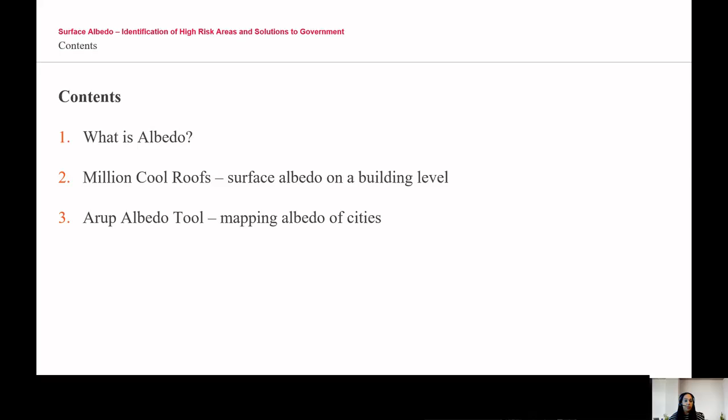So today's talk has three main areas. The first is just a brief introduction into what is albedo. The second then looks at this on a building scale and specifically through our work with the Million Cool Roofs Challenge. And then the third part of the talk looks at this on sort of a city scale with the Arup albedo tool.

So to start off with, what is albedo? Last month's webinar, there was a great presentation on urban albedo, and it was really fascinating. This month's talk is specifically about surface albedo, so I'll be talking a lot more about roofs. But to start off with, introducing albedo. Albedo is a measurement of the surface reflectivity.

So ice has a very high albedo of about 0.9, meaning that it reflects a lot of the sun's energy, whereas concrete and asphalt have a low albedo of around 0.3, meaning it absorbs a lot of the sun's energy which lands on its surface. With our increasing temperatures and our melting ice caps, the overall albedo of the Earth is decreasing, meaning less reflectivity of the sun's rays back into the atmosphere and a greater warming effect.

Many die every year from overheating, particularly in less developed countries where mechanical conditioning just isn't feasible. And a simple solution to this lies in our urban environment and choosing materials that will increase reflectivity, like white roofs and white roads. With the incorporation of lighter aggregates and cements, concrete can gain an albedo such as 0.7. And in Arup, we've been looking at this on a building scale and a city scale and how we can best present these albedo solutions to decision makers.

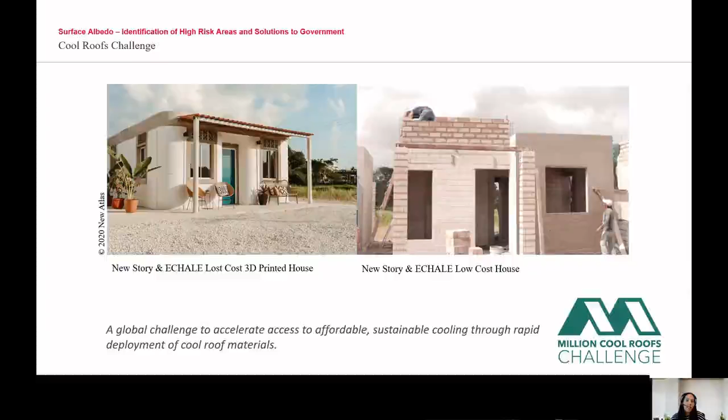or just too expensive. The Million Cool Roofs Challenge is an organisation involved in implementing high albedo strategies worldwide. And Arup have partnered with ECHALE and New Story, who were involved in the construction of building homes for families who are living in extreme poverty, often living in dangerous and rickety makeshift shelters. So the image on the left is an example of one of the houses constructed, and this is a 3D printed version, and the one on the right is constructed with more traditional methods.

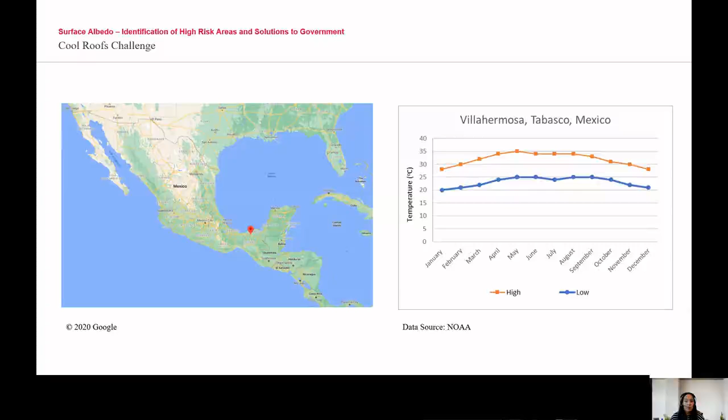It's worth saying that here the roof is flat, which is sort of advantageous for reflectivity, but also when talking to the families that will live in these houses, they were really keen on flat roofs as well, so that they could potentially build a second story if possible in the future.

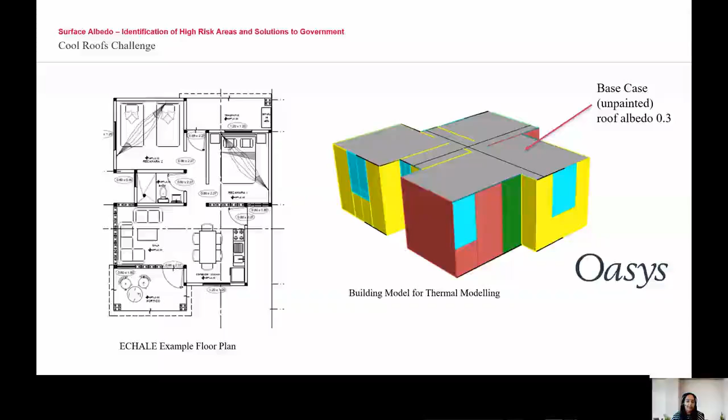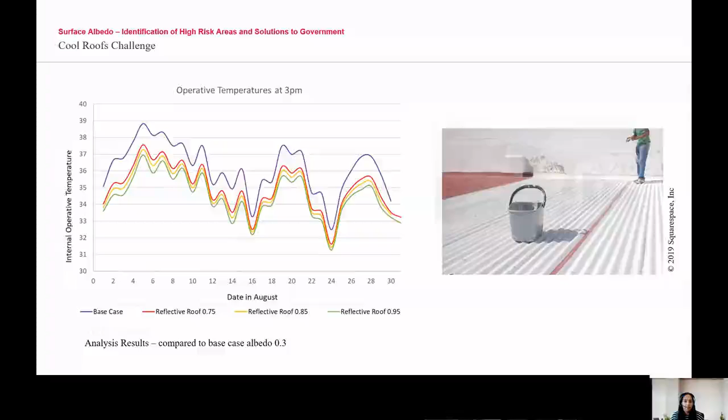We also took one of the cases, so we took the middle case, which was the albedo paint of 0.85, and tested this by also painting the walls white in our model. And here we see even more reduction in internal operative temperatures. So these albedo strategies have been recommended to ECHALE and New Story.

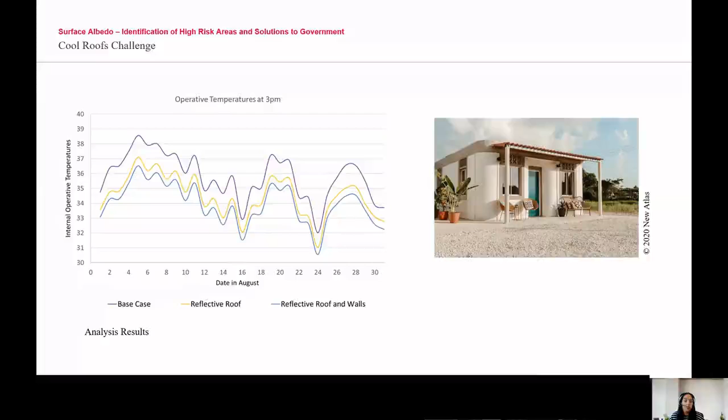It's also worth noting here that the whole study looked at also other passive strategies like blinds and glazing and the properties of windows, insulating materials, and the effect of these ventilation portals here. And a combination of strategies was the final recommendation. But actually, when we looked at each strategy individually, the albedo roof was found to be the most effective in reducing internal operative temperatures.

So albedo is a recommendation. It's a low-cost passive strategy at improving the thermal comfort of the houses, and we looked at this with modelling and operative temperatures. But to help us further talk to our partners and highlight the benefits of this, we're doing further research to quantify this in other effects other than operative temperatures.

So this is ongoing work, but initial studies estimate that when compared to cooling with mechanical equipment, we see about a 50 kilowatt hour savings across the whole month, which is about $5, which is a cost saving for the families, but also the energy savings are quite substantial, as this is just one roof at 50 meters squared. So you can imagine worldwide, albedo strategies could have an impact on our global energy spend and thus our CO2 emissions.

It's specifically targeted at vulnerable areas to overheating and is focused on energy savings for the buildings, and it's free for low-income families and schools, hospitals, universities, which leads me nicely into the latter half of the presentation, which looks at albedo on a city scale. So this is developing work in Arup, and we're using digital solutions to look at albedo on a city scale.

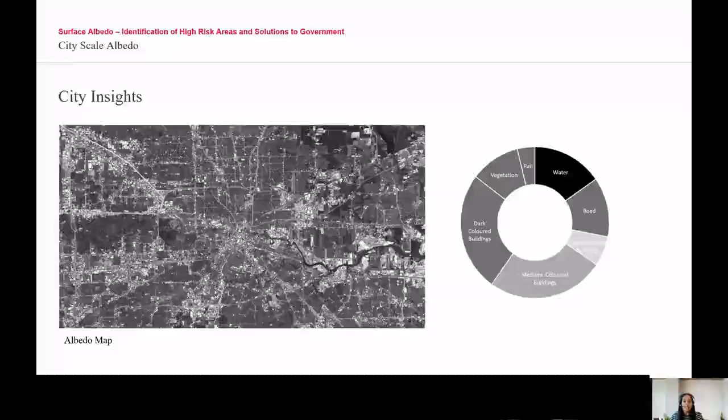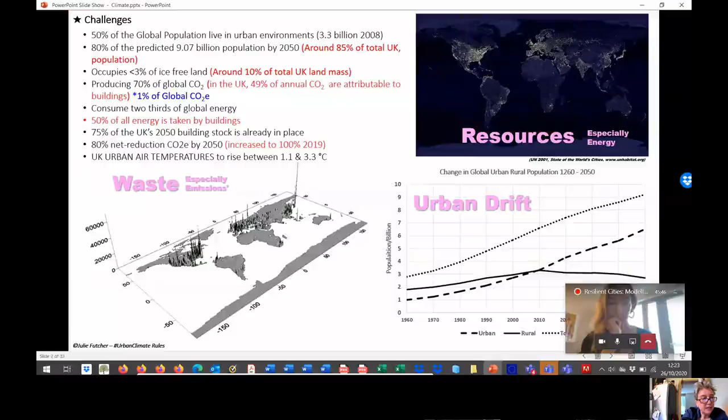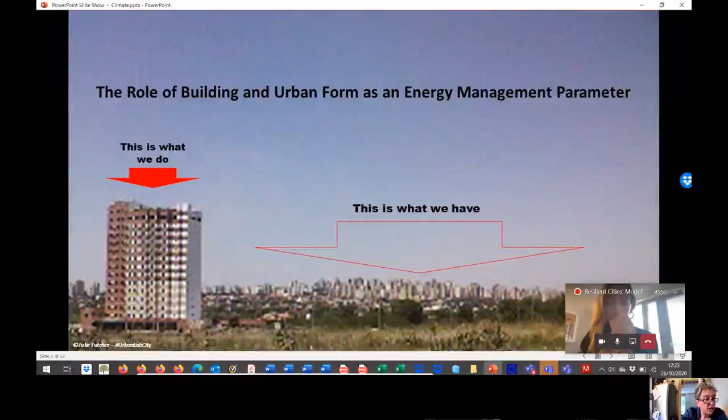And, of course, the changes in background conditions as a result of climate change, resource depletion, and building energy management. So, most of us live in urban environments, yet most of what we do is focus on the standalone building, which is really quite limiting. And we've looked at this through a series of studies in and around the City of London. Most of this research has been published and is available in a range of articles, both scientific and trade. If you contact me, I'm quite happy to send on that information.

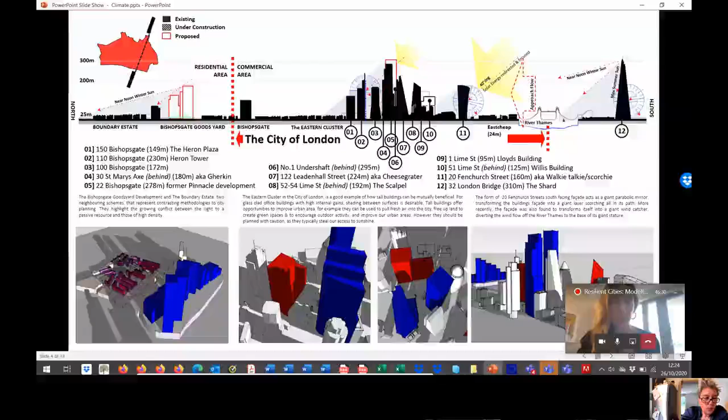But we've clearly demonstrated that the boundary of the building extends beyond its envelope and into the wider area. And this needs to be considered. We need to consider the net effects of our approach towards urban development.

We focus on the City of London for a couple of reasons, partly because it has a really interesting day-to-day profile. It has, or up until recently it had, a daytime activity level, Monday to Friday, 9 to 5. It was quite empty at weekends. It has around 500,000 people occupying quite a small space during the day, and during the evenings and weekends, it's quite empty. It also sits right at the very centre of London, so any activity that's happening, depending on the direction of the wind, is likely to encounter the City of London.

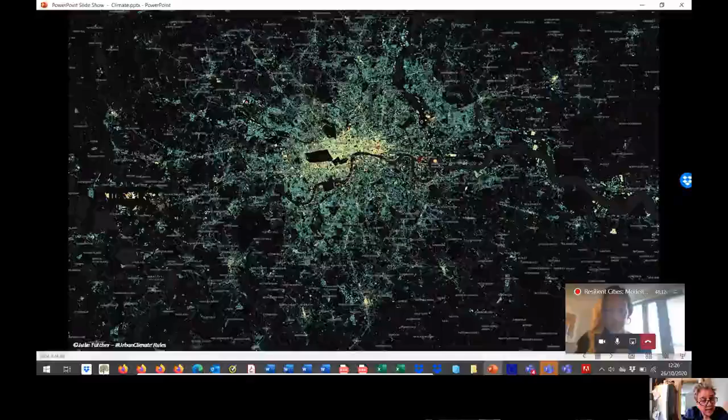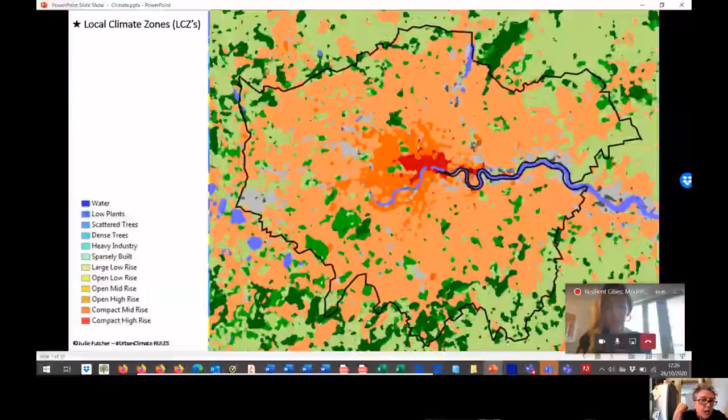This image here shows London's local climate zones. This is part of a global project that Gerald and I are involved in, which looks at the surface cover of areas of around 250 to 500 metres, so we can assess their intra-urban climate effects. That's the local built form outcomes that can be used to offset many of the wider issues that we face when we focus on the urban climate at the urban scale. For example, the urban heat island.

These areas here represent Heathrow. We can see that this is quite a vast area. Richmond Park, Hyde Park and the City of London. Hyde Park and the City of London are relatively similar in size, as are Heathrow and Richmond Park. But we can see here that there's quite a difference in their temperature. You can see this is the edge of the city, where the temperatures are quite reasonable, but still lower than what we find in the inner city areas. And when we have parks such as Hyde Park here, there doesn't seem to be much of a difference at all in air temperatures compared to the surrounding area. That's because we're looking at the accumulated effects rather than just the actual intra-urban effects.

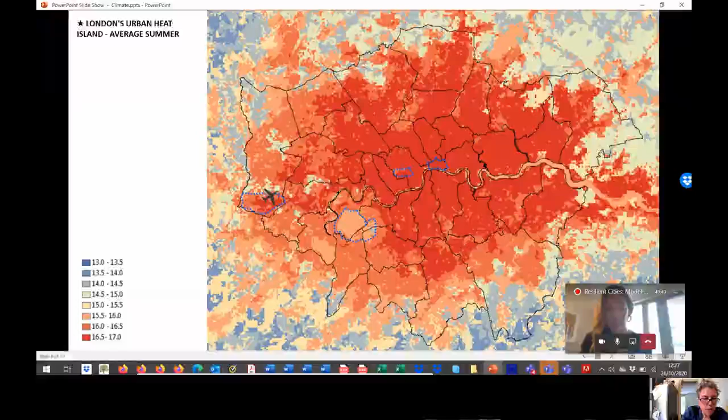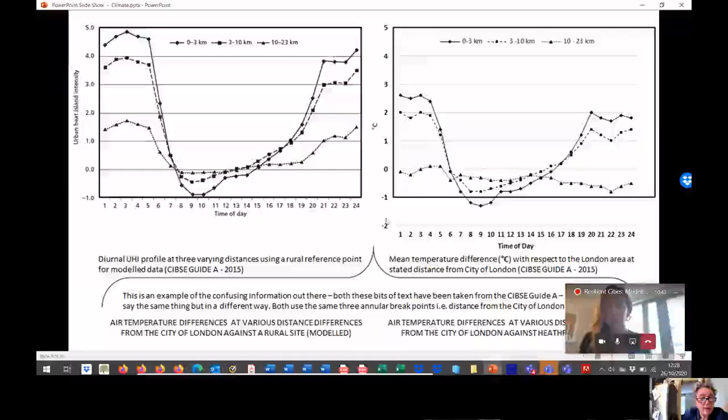So we've been exploring these outcomes in more detail. I've just put this slide up here because this is quite a good example of how confusing a lot of the information out there is. Both of these graphs tell us the air temperature differences between central urban London and a site outside of London. This one here shows us the temperature difference between the 3 zones in London compared to a rural location. This one here shows us the temperatures in the 3 zones, central, semi and outer, but from Heathrow. The temperatures are the same in both sites, but we can see that depending on where we're comparing, there's quite a big difference in these outcomes. This is as a result of the underlying surface.

But what we're focusing in on here is the built form effect. So how the development of the urban area, the size of the buildings, the streets, the width of the streets, can have a really impactful outcome on both the building energy management and the climate. So it is that relationship between the two.

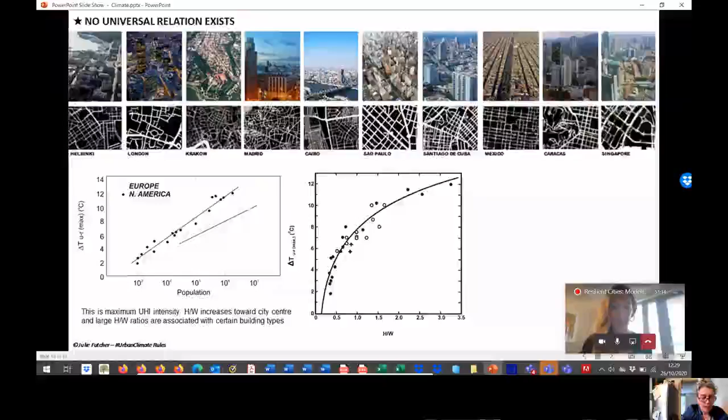We know that built form drives urban climates, but it's not considered as an energy management parameter. Our built forms are driven by the historic footprint. Here we can see London, medieval London. We can still see some of the streets. Once the building footprint or the urban footprint is in place, it's quite difficult to change it.

Even when it comes to installing massive infrastructure projects, such as we have here, the Crossrail link, it still has to wind its way through what's going on underground as well as what's going on above ground. So we have quite a complex arena that we have to deal with. So it's almost that built form gets shoved out.

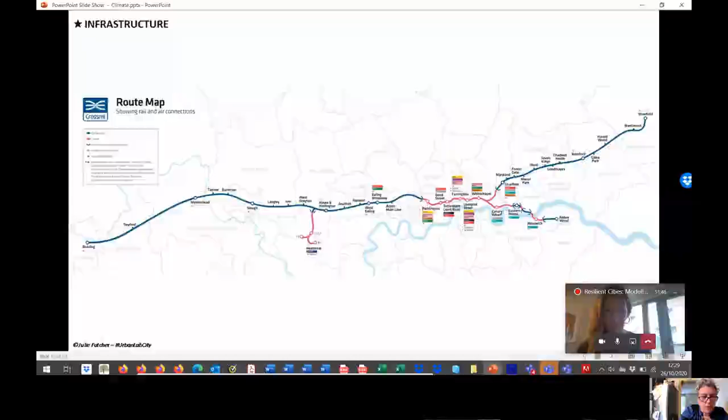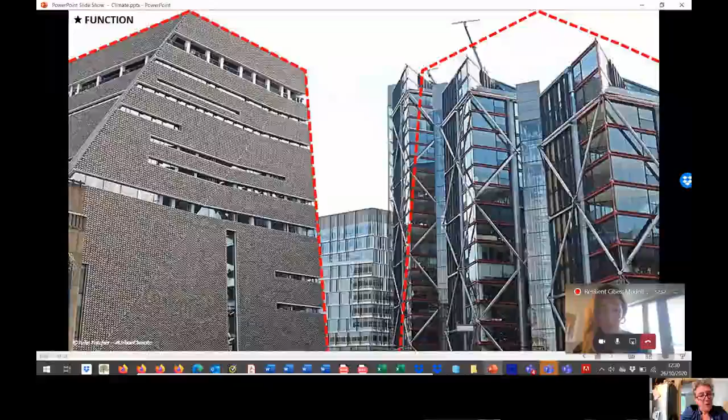We talk about removing the urban heat island, but actually maybe what we want to do is optimize the outcomes of these climate effects. We need to understand that it's the surfaces and their proximity to each other that manage these effects. Height to width ratio is a prime example that we like to use quite a lot. I know I'm running out of time.

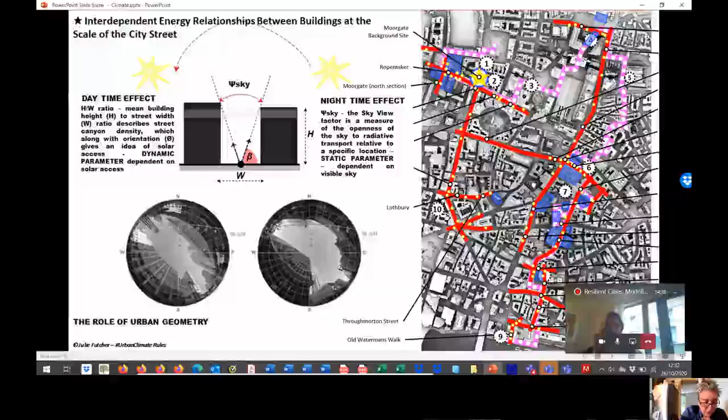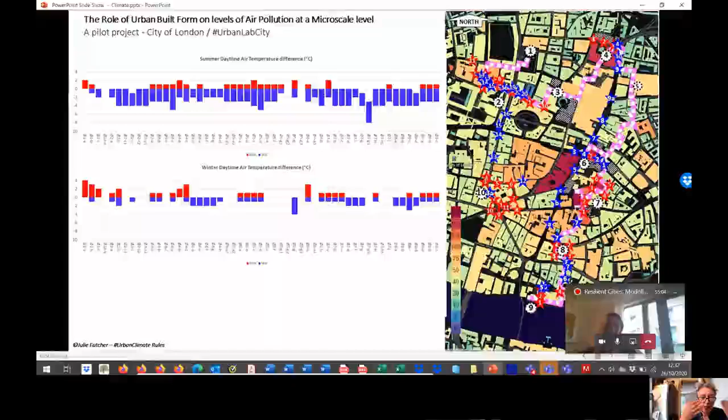So what we've done is we have been monitoring the city for a couple of years with the City of London. This project is nearly coming to an end, and we're looking for some more opportunities here. We measured the air temperatures, and we can see that around the tall buildings, for example around the Eastern Cluster, the air temperatures are always lower, which means that these taller buildings are having an impact on air temperature. What we assume they're doing is bringing in the cooler air from above the canopy top into the streets and allowing these streets to be vented.

We looked at that in terms of wind as well, and here you can see around 20 Fenchurch Street. In the winter, there is quite a dynamic range of wind speed. Obviously, this is not comfortable, and you could not necessarily sit down and have a cup of tea there. But maybe these buildings actually provide us with an opportunity that might be useful in terms of managing our climate at street level, as well as the building's own energy management.

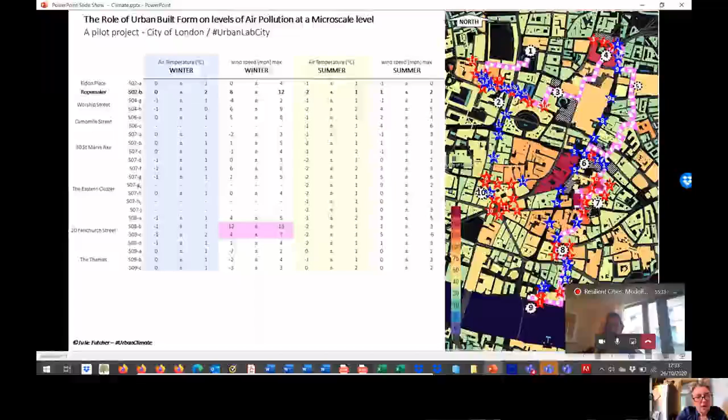We've run a series of air quality tests on these sites as well, and our results were quite surprising. This graph here, red is no, yellow is okay, and black is we're in big trouble, is the air quality along Moorgate and along Bishopsgate. Despite the levels of traffic at each of these sites, we know that Bishopsgate has a lot higher levels of traffic. It's a lot more congested than Moorgate. We find that actually there's not too much difference in the air quality.

But what we are suggesting here is that the uniform form of Moorgate is actually containing any of the pollutants that are released there, whereas Bishopsgate, with its difference in building heights and street widths, is actually having a much more dynamic effect and helping to vent out a lot of the pollution. This black area here, we found a very dangerous spot, which was underneath a temporary canopy, which draws questions around the suitability of overhanging canopies for shading pedestrians, actually trapping pollution.

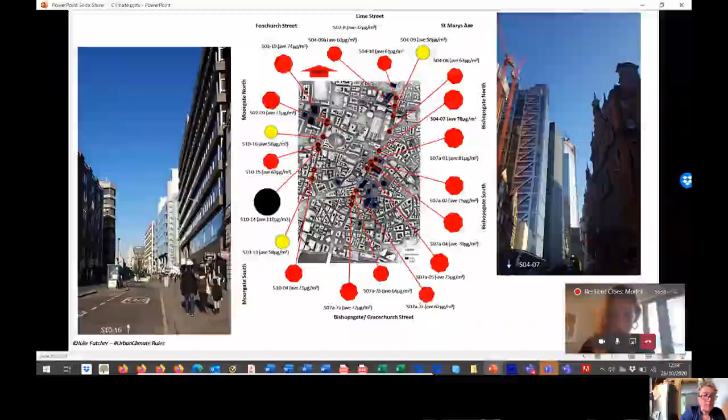And this fits on to some other research that we've been carrying out as well. We have found that if you have a series of tall buildings and relatively low levels of traffic, we have quite good air quality. Having tall buildings by themselves is not enough, and having low levels of traffic alone is not enough. It seems that these tall buildings address to some extent the accumulated effects that the City of London is experiencing.

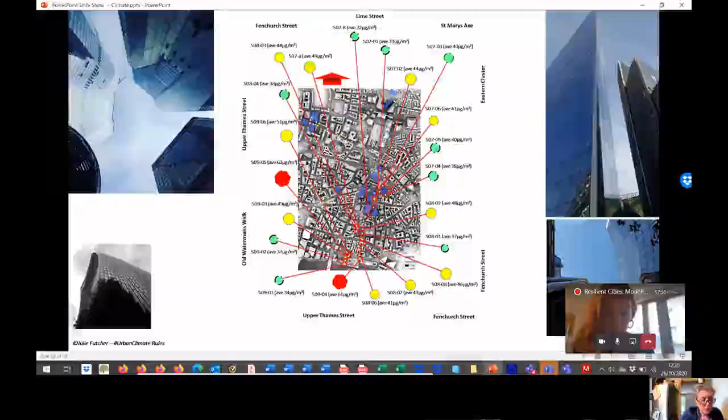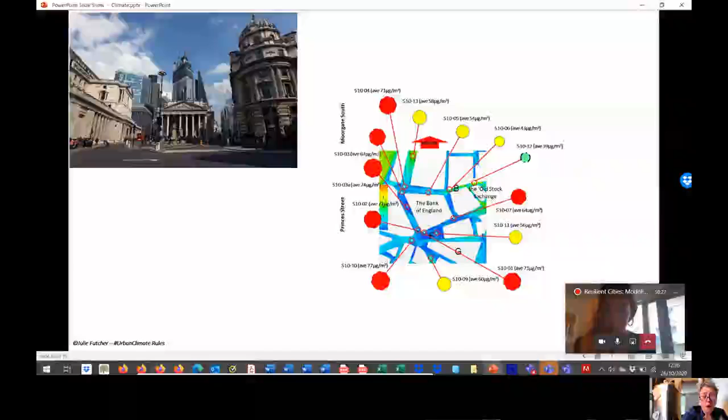This is our verification model that I'm more than happy to talk to anybody about, which shows that our readings matched quite nicely to a CFD model. And here we can see this green for go again at the base of the tall building, and you can see how the tall building is helping to flush this cool, cleaner air down here. We don't know if this is just moving on the problem, putting it somewhere else, or if it's actually helping to remove it completely. We need a lot more work done.

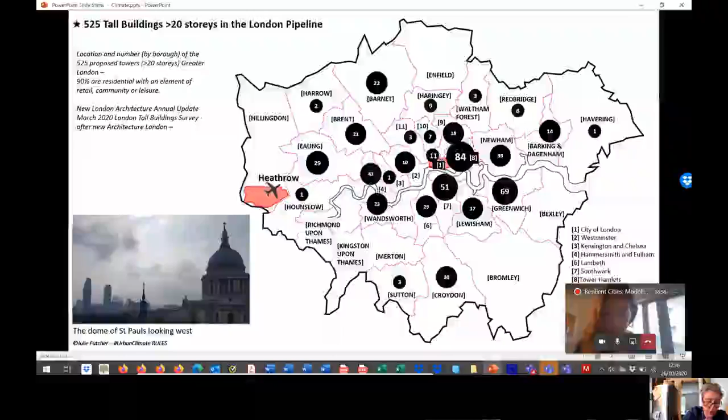So why is this important? London's actually undergoing a change to its morphology, which will have long-term effects. Currently, there are 525 buildings planned of 20 stories or greater in Greater London. We don't really know enough about the impact of these buildings, good and bad, on their wider environment. We go back to that question, where does the boundary of the building lie? And we've also identified a need for a new accredited built environment discipline, which is something that we're working on.

We can no longer deal with these significant challenges as independent disciplines. We're addressing all of this through a series of urban climate responsive events with the Edge, which are about to re-emerge. So that's everything. Thank you very much.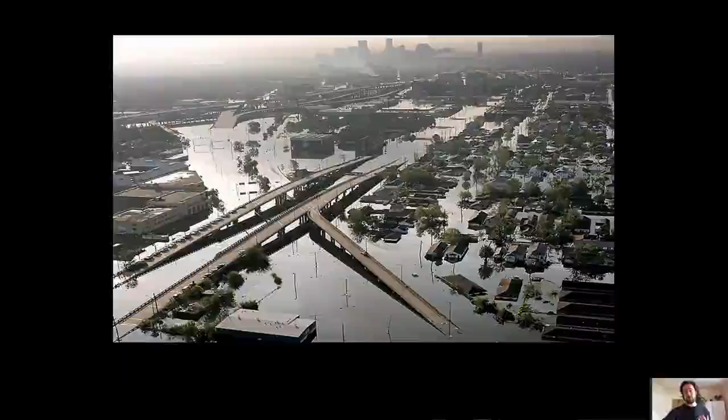Already touched on Hurricane Katrina. The idea about building back was strongly questioned, because if the situation was already undesirable, we shouldn't be going there. But which way is forward? And as some of that poster campaign said, there was perhaps an unfair distribution of costs.

And very contemporary at the moment, the phrase "build back better" is being put around, and we're going to see in real time some of the debate about who's better, how are we going to do this, and unless there are more effective tools, it may mean that actually we're not building back better, or building back to only some people's better.

This is where we as a design practice have been involved in participative design almost from our inception. And so we believe that participative design can offer some tools to remedy some of the critiques. So just a quick working definition of what we mean by participative design. It is an active collaboration of all the stakeholders in the design process. And it's predicated on the idea that a wider and active stakeholder group will bring knowledge and resources to co-create more appropriate responses.

And specific to us, we want to focus on stakeholders who are most impacted and have the least agency. And that key one, which is that consultation is a passive approach, options A or B, whereas participation is an active involvement in the process. So I'm going to move on now to show some active ways of how we have used participation in our projects.

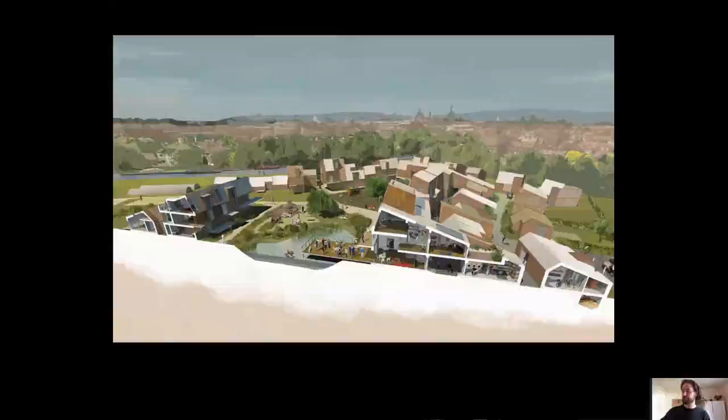So, for example, House of the Commons was a series of big seminar events that we ran. Homemaker is a common theme. It's a 3-year action research project entering year 3, which provides a common thread between all of them. Open House and Floyd's Row are the two I'm going to focus in on more now.

So Open House is what is sometimes called, as a buzzword, an urban room. This is an underused or empty shop in a very affluent street in Oxford. It was repurposed for a 1-year project with a brief of creating an open and welcoming space for people who've perhaps not spoken before to come and discuss housing and the effect of the housing crisis upon them. So running workshops, talks, events, and on the most basic level, it offers a place for someone who may be experiencing the sharp end of the housing crisis to come and drink a cup of tea.

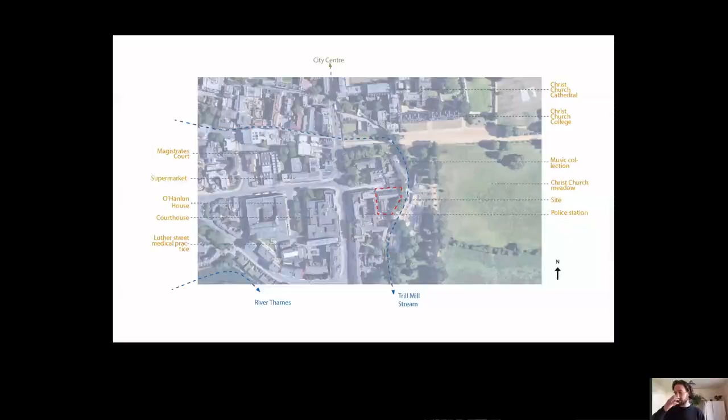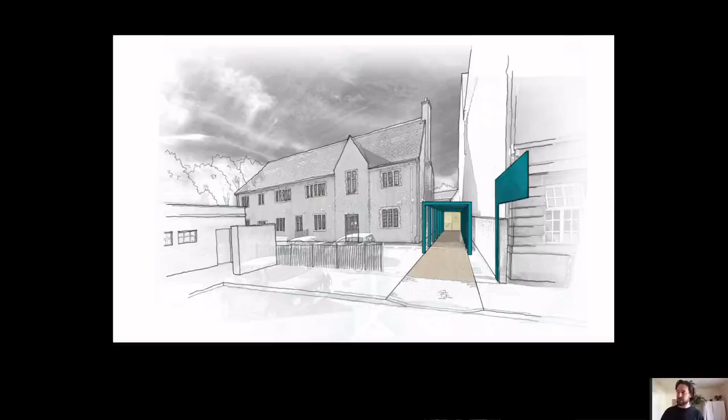For those people who know Oxford, this was located in Christ Church, so right in the centre of the city. It was in a slightly austere sort of late 18th century building. Despite being very central, it's actually quite remote, or quite kind of hidden down a side street.

And again, to Oxford City Council's credit, in the tender we put forward to run a participative process. And this is something which they were willing to pay for and see as a huge value added for the scheme. So whilst we were working on work stages 1 to 3 with this participative approach, in parallel and in partnership, Jessop and Cook were doing work stage 4. We had a very tight turnaround in this project.

So some of the tools we took out of our participatory design toolbox was a rigorous analysis of the precedents, insight interviews with the stakeholders, in-depth brief development, so really taking the earlier findings and wrapping that inside of it. Two-way building tours where we're going around with people with lived experience of homelessness, lived experience of going through these kinds of services, and them advising us on what they could see. So as much as them telling us as us saying, this is our design. And then followed up with multiple design workshops.

Haven't got a huge amount of images from the design workshops due to privacy issues. We took a very visual approach to make sure it was a very accessible process, particularly because some of the people we were working with had quite complex needs. And then from this kind of mess, or what you might see as lots of voices coming in, we boiled this down into a work stage 2 report, which included design principles and really going through space by space brief development alongside an architectural design as well.

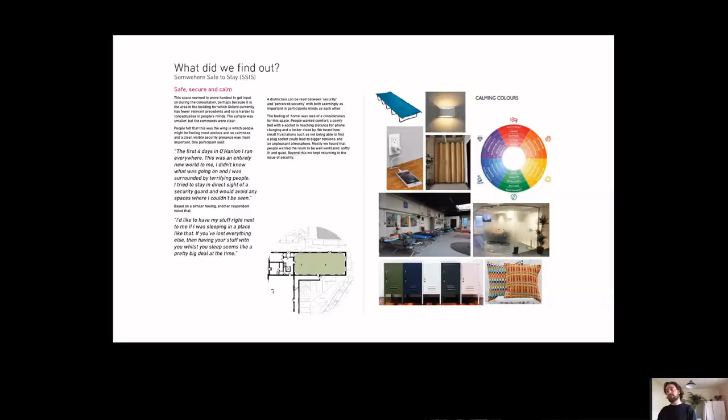So not going to go into all of them, but this is an example of when we were looking at one of the spaces for the somewhere safe to stay, looking at all the things that were required in that space. And this was a direct result of the participation. So to translate those voices and those findings into a spatial outcome.

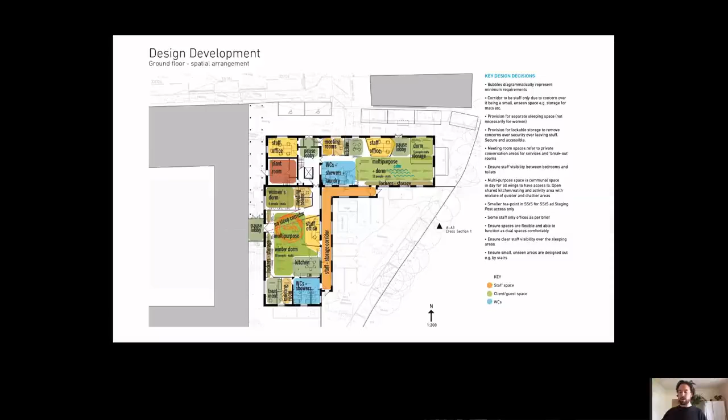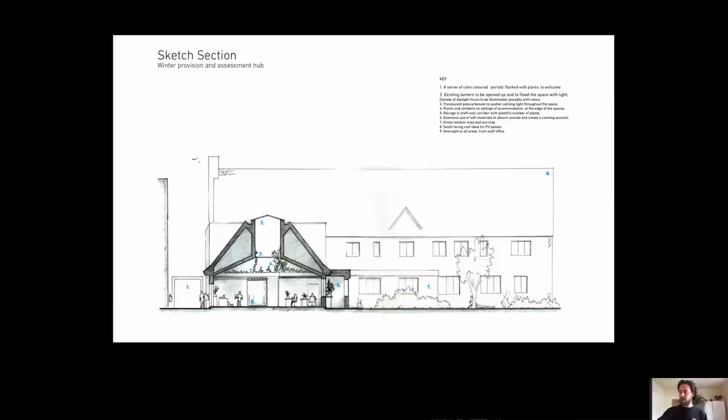And working through, so creating architectural drawings which have a greater amount of visual approachability to them. So again, something we can think about: how we slightly change our tools to get them to a wider audience to improve the participation. And then slowly translating that further into something which is more recognizable as standard architecture, but it contains all of the aspects that we're looking through.